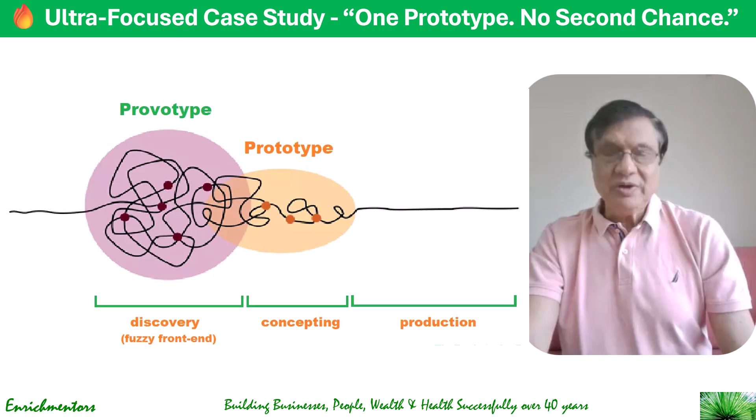Hello and welcome to this first case study in this introductory section in this course, Winning Prototype and Product Development. Let's take a look at this case study of developing a winning prototype and product in the first attempt, an almost impossible thing we're trying to attempt ourselves. This is an ultra focused case study of one prototype, no second chance. The whole case is about developing the prototype and getting it right the very first time. We're not going to talk about branding, marketing, scale up, distractions. This is ideal for engineering, design, innovation, and development training. So that's what we're going to talk about: one prototype, no second chance, only prototype.

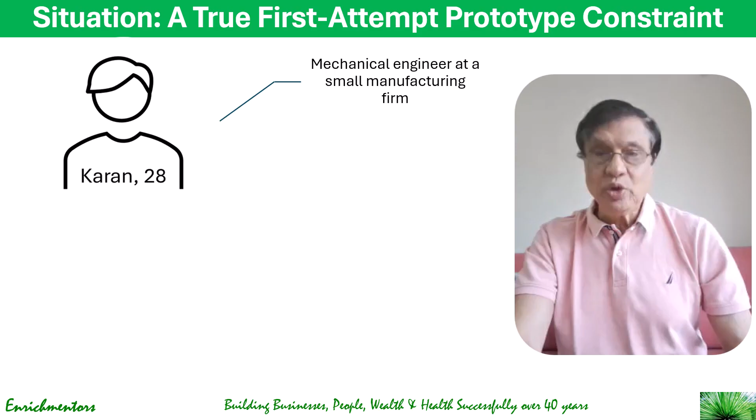So what is the situation? It's all about Karan, a masked, face masked person, 28 years old, a mechanical engineer at a small manufacturing firm, who's been tasked with developing a new foot operated water pump for rural households.

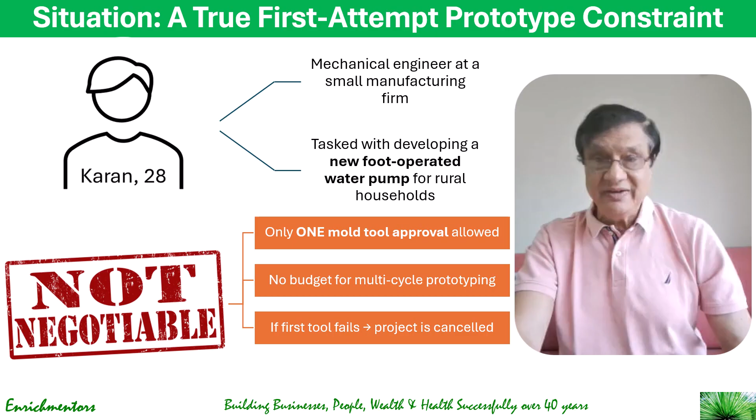But there are very non-negotiable realities facing him. Only one mold tool approval is allowed, he'll be able to build only one tool, one mold, so he cannot fool around with having multiple molds. There's no budget for multi-cycle prototyping, he has to get it right the first time. If the tool fails, the project is cancelled. It's that serious, and 40,000 units will be built directly from this prototype design. His manager says your prototype is your final product. There's no safety net. That's a true first attempt prototype constraint in this situation for Karan.

So what exactly is the challenge here? The challenge is how do you design a physical prototype that will behave correctly across thousands of units, locations, and usage styles on the first attempt? Because errors in the prototyping stage happen through geometrical flaws that get replicated 40,000 times, weak link failures at national scale, permanent tooling loss, and immediate market rejection. These were the many challenges Karan was facing.

So how do you design? Let's take a look at what he did. First, he tried to understand why the first prototype failed. He studied and concluded that mistakes in prototyping happen because we design for one user type, and it becomes fatal because real world diversity breaks it. Second, we test it in clean environments, and it fails because field conditions destroy it—they are not clean. Then we test prototypes for lab loads only, and real abuse is much harsher, which becomes fatal for the prototype.

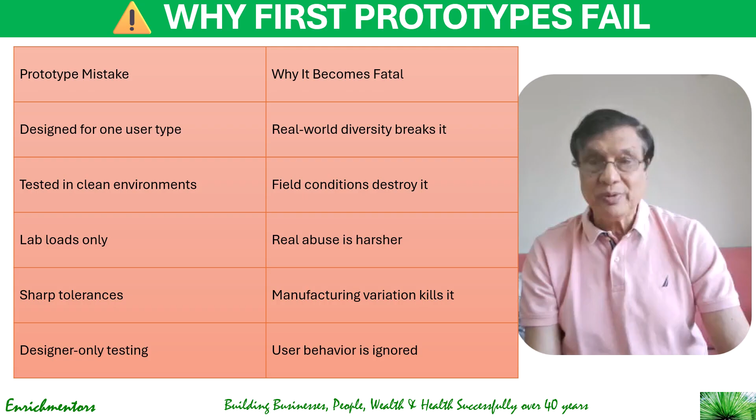Once he learned that, he decided to use what is called a zero iteration prototype engineering discipline. Now what is that? It isn't a single formalized field, but rather a concept pushing for near instantaneous design, test, refine cycles using advanced simulations like EDAS, AI, and seamless digital-physical integration, aiming to achieve zero iteration time, where feedback loops collapse, allowing engineers to fail fast, fix instantly, and evolve designs without waiting for physical builds, moving beyond traditional slow physical prototyping to rapid digital evolution and faster delivery. So that's what he decided to use.

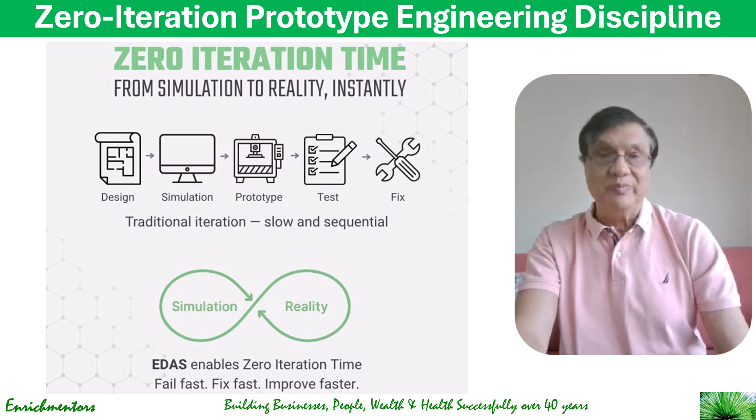Now let's see what he did. He built a five-step model, which he called the first attempt prototype protection perfection. Let's take a look. First step: he locked the prototyping problem before doing even any sketching. Instead of saying 'I will design a pump,' he defined the required outputs in terms of product specifications—what the customers want, which in turn the product should deliver—before getting into product or process control design using the QFD process, quality function deployment.

If you're interested, you'll see this in the case study as the course goes along. These outputs included 20 liters per minute of output, continuous usage for 15 minutes, negligible leakage, withstanding muddy water, and being operable by a 12-year-old or a 65-year-old. This becomes the product specification or prototype performance contract—this is what the prototype must deliver. That's how he locked the prototype problem.

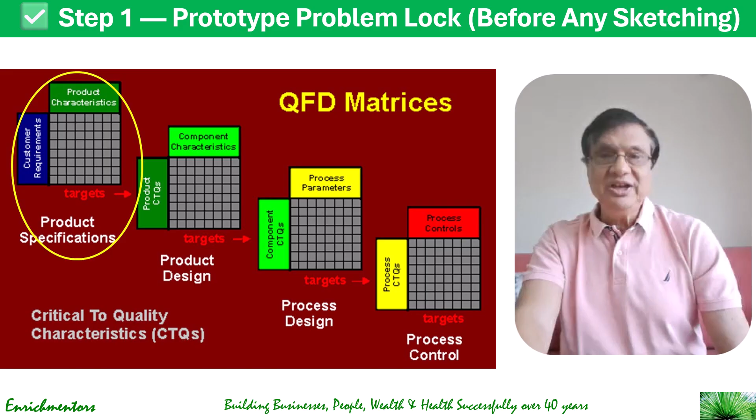Then he got into thinking about the failures first, before even designing.

With some rough design in his idea, he used FMEA, failure mode effect analysis, where instead of asking how should the prototype work, he asked how is it most likely to fail. He designed explicitly for breakdowns he figured were frequent and likely to happen, like seal failure, lever fatigue, backflow jamming, sand ingestion, and misaligned stroke. He anticipated and brainstormed the possible failure modes and how they could affect the design at this stage.

The prototype was built around resisting these failures, not just delivering the output. So the second step was failure-first design, not function-first design.

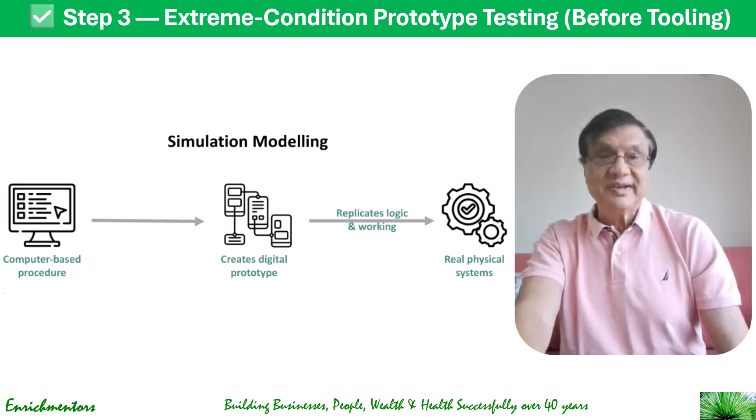The third step he did was extreme condition prototype testing before tooling. He simulated 10,000 stroke cycles, drop testing, tilt misuse, overpressure, and mud plus sand contamination. He intentionally allowed children to misuse it, elders to force it, and users to operate it out of rhythm. Only after surviving abuses like this did the design move forward.

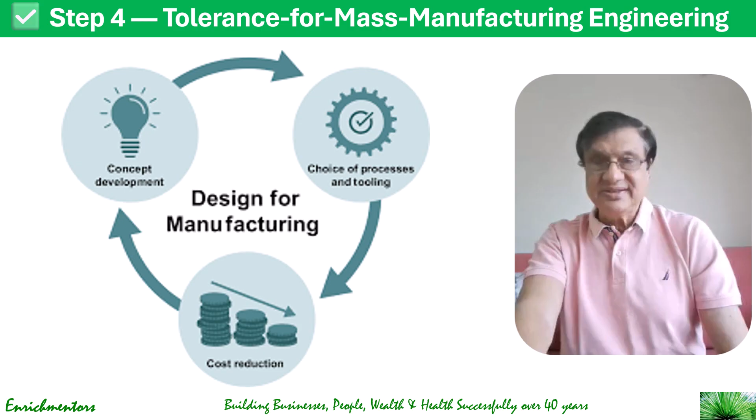Then, in designing, he looked at design for manufacturing, or tolerance for mass manufacturing engineering. He deliberately loosened non-critical tolerances, added self-aligning joints, introduced symmetrical parts, and eliminated exact fit dependency in discussion with the production team. This ensured manufacturing inconsistencies did not become a failure. That was the fourth step.

Finally, he made a single shot tooling decision gate. Before approving tooling, he said the design must pass eight irreversible checks. The first was repetitive fatigue endurance - the design must be able to endure fatigue again and again.

It must also tolerate field contamination, survive user misuse, tolerate thermal expansion, have immunity from assembly errors in production, resist transport damage and material aging, and survive maintenance neglect. Only when the mold met these eight tooling decision gates was it approved. That was step five.

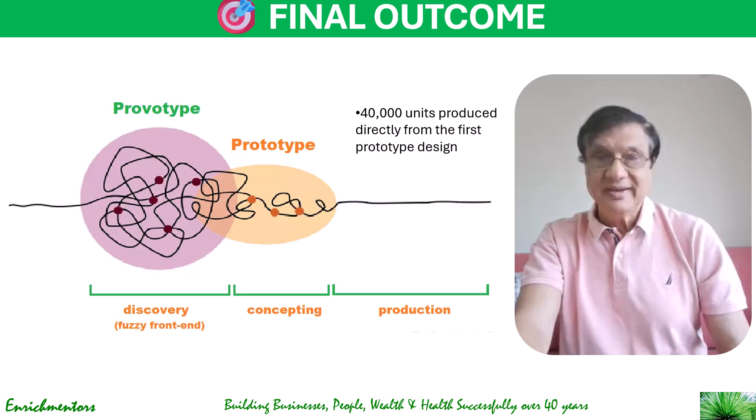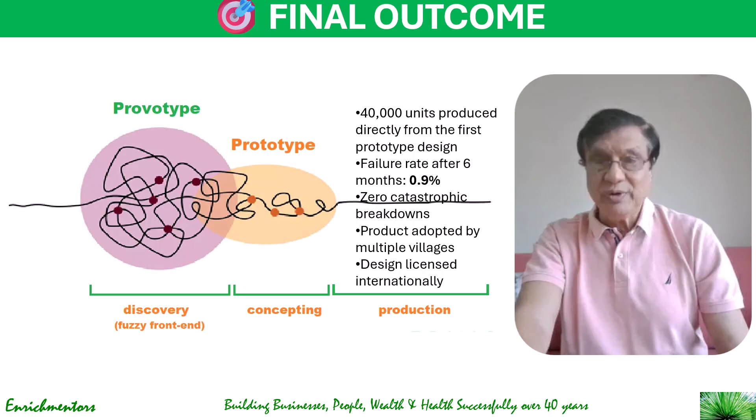So what was the final outcome? Once he designed this prototype with this approach, 40,000 units were produced directly from the first prototype design. The failure rate after six months was 0.9%, quite significantly good, though could be better. There were zero catastrophic breakdowns, no major breakdowns, and the product was adopted by multiple villages with the design licensed internationally. The factory manager said, this is the first time we have trusted a first prototype and it hasn't betrayed us at all. That was the final outcome.

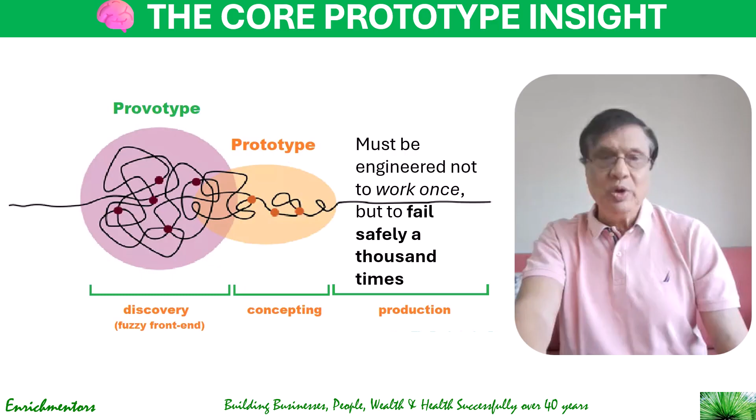So what is this insight to develop a core prototype? A first attempt prototype must not be engineered to work once, but to fail safely 1,000 times. The focus should be on avoiding failures. And if you avoid all possible failures, won't it work? That's a core prototyping insight if you want to get it right the first time.

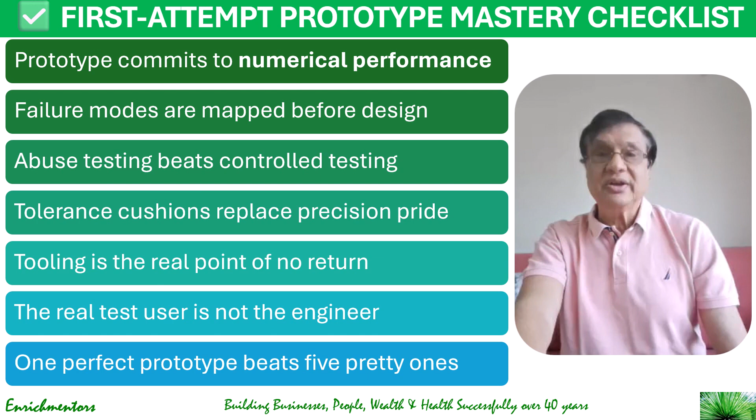So what do we do in the next module? We get on with understanding what is a winning prototype. We have defined it, and we will bring in some marketing concepts so that the prototype you develop not only gets accepted within the team but also by customers. So we will define what that winning prototype is and then discuss how you can develop such a prototype using some of the principles we have already talked about.